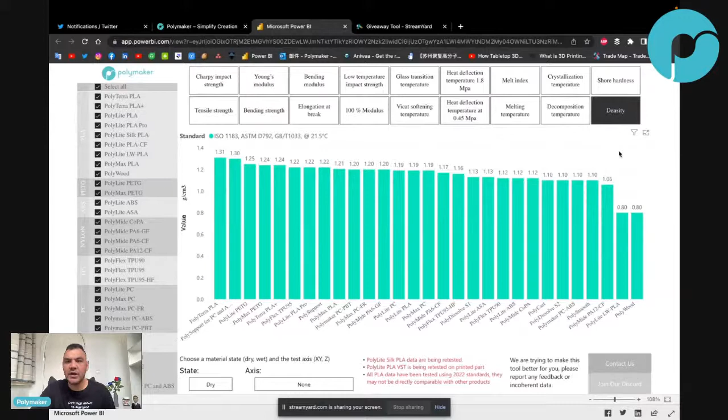So you have the Young's modulus, bending strength, elongation at break, blah, blah, blah. You have all the data that you have in the TDS, but now instead of downloading all the TDS and trying to put them together and compare the material, you just come here and select what material. Like this is the density of all our materials. You have the shore hardness, the crystallization temperature, melt index. You test the melt index at different temperatures, so that's why there's many different colors depending on the temperature.

So this is what we talked about, I think, a month ago. I told you that I'm going to make a more interactive tool. So that's the tool. What do you guys think? It's not a beautiful design, but it's very functional. So hopefully, when I explained what I wanted to do, the picture you had was more or less this.

I feel bad because I've never used Polymaker filament. Destruction, don't feel bad. As long as you have used filaments, at least. Do you have a 3D printer? If you have a 3D printer and you print some stuff, then that's fine. Whether it's Polymaker or not, that's a different story.

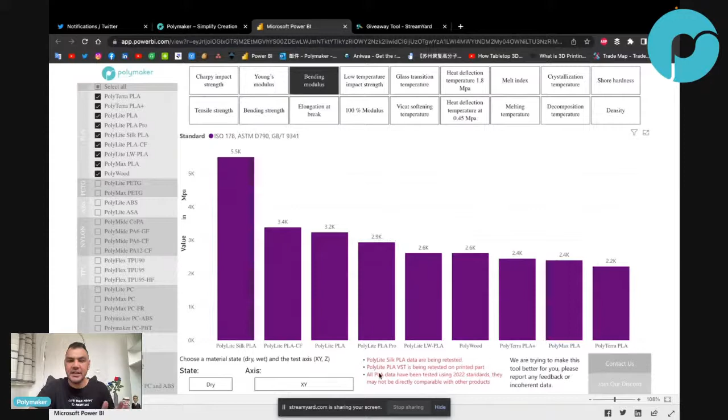If you go in the Vicat softening temperature, here you can see Polylite PLA is 158. The reason is that Polylite PLA is an old product, and before we were taking the Vicat softening temperature of the filament, not the printed part. Because of our jam-free technology, the filament has a high heat resistance, but once it's processed, the heat resistance of the part is the same as regular PLA. So that's why we need to retest this Vicat softening temperature, testing the printed part, not the filament.

And then all the PLA data are using the 2022 methodology, and all the other ones are using the old methodology. So that's why sometimes comparing our PLA with other materials can be a little bit strange. And if you find any other data that looks strange to you, feel free to contact us here. If you click here, it will redirect you to the contact us page, and you can just say, hey, I checked the glass fiber nylon, and the modulus is higher than carbon fiber, but theoretically it should be the opposite. You send us this, and we will have a look. Or you can join our Discord. If you click here, it will invite you to our Discord.

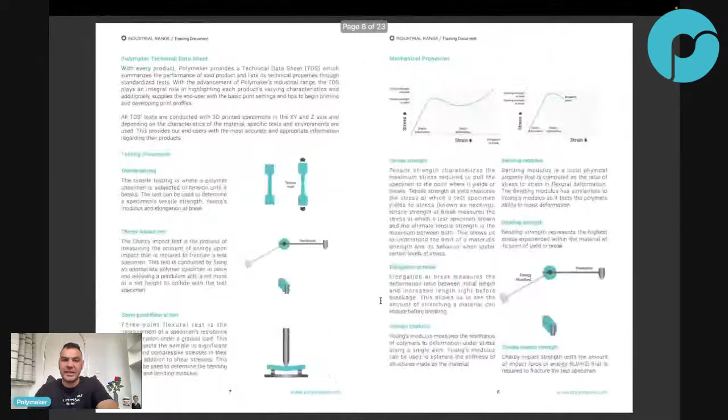Matt just posted an idea on the Discord that I think would make the site much more useful for the general public. Okay. If it's possible to add photos to the explanation card, that could be really helpful, like the Polymaker training document. Yes. So Zombie and Matt wanted to have more explanation. Like if you click on something, then you have an explanation of what it is, like Charpy impact strength. And I'm going to use this. We are going to go through this one in a minute, and this explains properly what each test is, with a picture and the explanation.

So I don't know how I'm going to do that yet. Maybe a second tab or something. When you click, if you want more information, you go on the second tab, and then you will have the explanation. So that could be version 0.2. So yes, we're working on that.

Is the blue glow in the dark going to come in stock again soon? Tim, not at the moment. We launched it as a beta version.

We had some feedback that the brightness was not as bright as the green, so we put it back in R&D. But it happened that it's very, very hard to make a color other than green that has as much brightness as green. So we may just release pretty much the same, maybe slightly brighter. But that's the reason why it was on the market as a beta test, then removed, and then we might put it back, most likely Q3 this year.

The Poly Clear intrigues me. Yeah, I don't know what the Poly Clear is. Is that a new product from us? I don't know.

Design could do some work. Yes, I know. There is basically only one small logo because I'm more of a data guy. So as long as you can select the data and stuff, for me that's it. But I haven't run it through our designer yet. Once I do that, then I will.

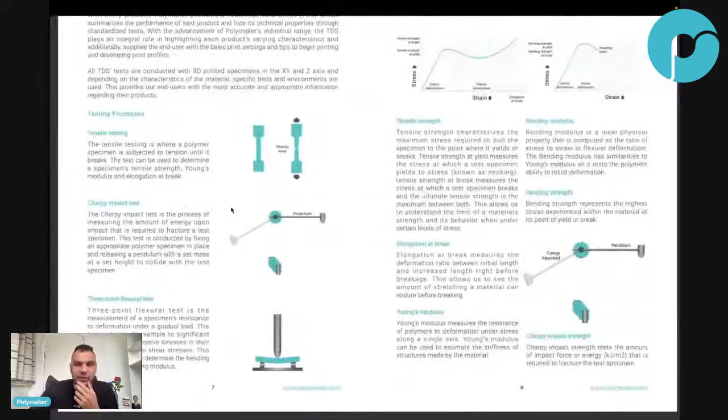Okay, so let's go into the details. I will walk you through the training document that I created for Polymaker, and then we'll go point by point. Some of them will go a little bit fast, some of them less. And if there is anything that you don't understand, just quickly put a chat message, and I will stop a little bit and explain more about that. Okay. So let me go through that.

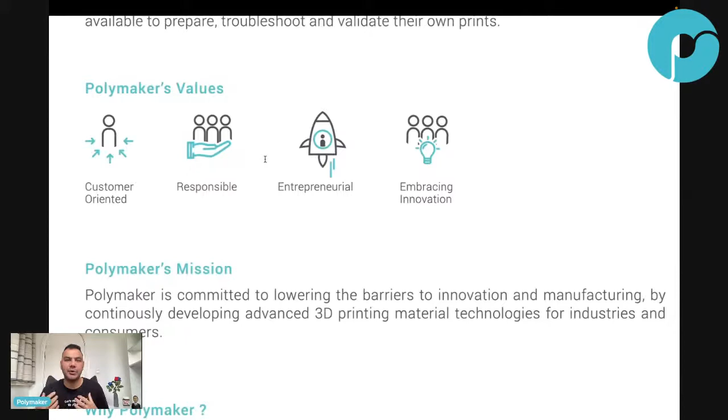Okay, so Polymaker values. By the way, did you know our Polymaker core values? Anytime we have new employees or some team building, we refocus on our core values. I don't think we market it a lot because it's really for our team, like what our principles are. But I just want to highlight them a little bit.

So customer oriented is our first one. We really have open ears to customers. Basically, they are the ones building products. They are the ones that use the product. So they are the ones that know the most about what the product should be. So that's customer oriented.

Responsible is when we do something, we are really responsible for it. When we take a decision, we are going to protect that decision. For example, if at that time we decided to launch a cardboard spool instead of a master spool, then we are responsible for that. If someone comes and says you should have launched master spool, then we will defend ourselves. We took that decision for a reason, and we are going to say that reason. Polymax PLA is the toughest on the market, and we take responsibility for that claim, and we will back it up.

Entrepreneurial is a spirit everyone in Polymaker has. You can see me, for example. Doing this stream is not really my main responsibility, but the company gives me the flexibility of doing new stuff, being intrapreneurial, like being entrepreneurial within a company. So that's a little bit this.

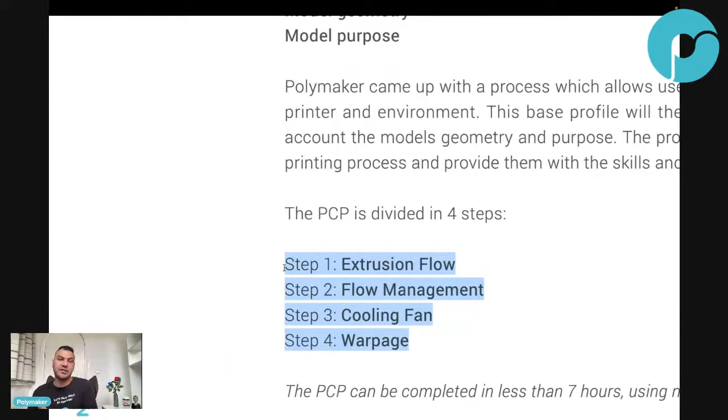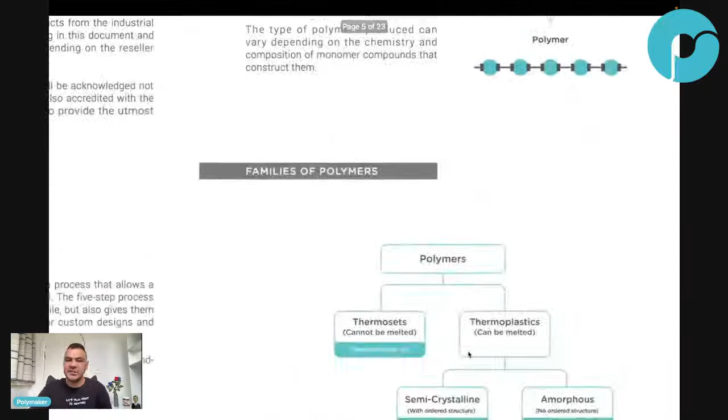And then I divide the PCP, blah, blah, extrusion flow management, cooling fan, warpage. If you deal with all of this, then you should have a very good profile by only doing this 4-step, blah, blah. So this is like a more detailed part of that training. So I start by the polymer definition. I think you all know that, monomer, and then transform into polymer, no problem. For the families of polymers, I think you are more or less all familiar with this one.

The fact that you have the thermoset on one side that will cure and cross-link, so cannot be reprocessed. Then you have the thermoplastic, and then in thermoplastic you have semi-crystalline and amorphous. So if there's any of you that is not familiar with this, then let me know. Basically, semi-crystalline: PLA, nylon, PP, this kind.

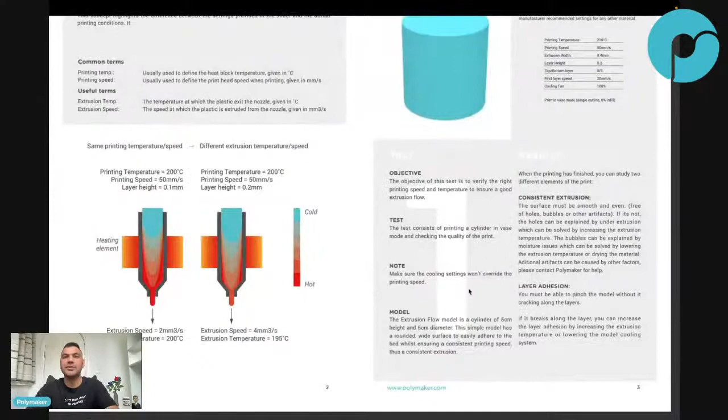Oh, am I dropping? Let me check. I think I need to change my VPN. I'm dropping a little bit. So actually, I don't need VPN. Sound choppy. Yeah. So let me close my VPN. I don't need it for now. I'm not going to go on YouTube or things like this. So let me turn off my VPN for now. Let me turn it off and reload. So don't move. Okay. So now it should be better. I removed the VPN. I don't need it as long as I'm not using Google or YouTube or something. I'm just using my PDF. So is that good?

How strong is the nylon without post-processing it? By post-processing, do you mean annealing or do you mean moisture conditioning? Like, do you mean putting it in water for some time, or annealing it, like putting it in the oven? Yeah, so the annealing will increase its modulus. How strong is the nylon? Or stronger? I don't know if you need specific factors, but stronger.

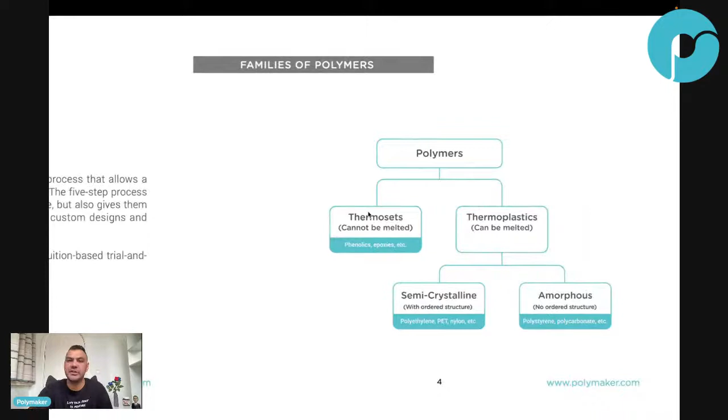Okay, all good. Yeah, so it should be very good now. I completely removed the VPN.

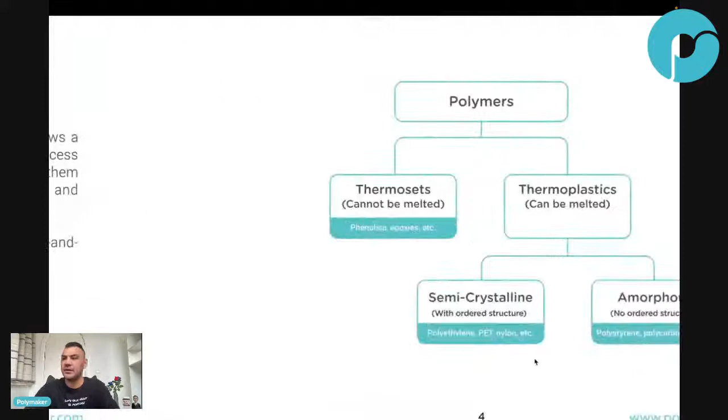Okay, semi-crystalline amorphous. Okay, do you remember melting temperature? That's one of the biggest misconceptions. Okay, what's the melting temperature of ABS? There's none, right? There's no melting temperature. What's the melting temperature of PC? There's no melting temperature, right? You remember, melting temperature is the temperature at which the crystals melt. So if it's an amorphous, then there is no crystal, so there is no melting temperature. Okay, so just to remind, semi-crystalline and amorphous.

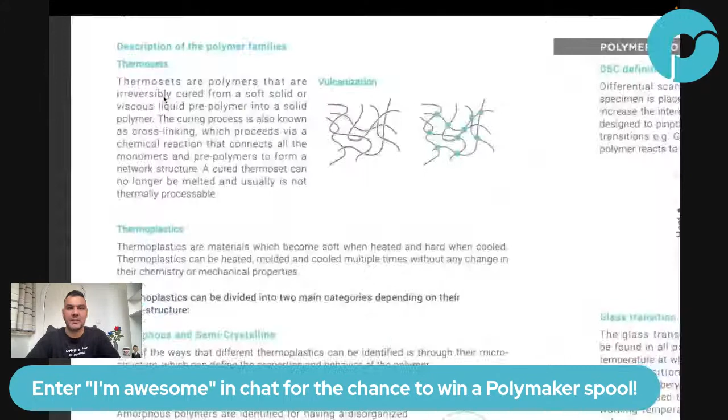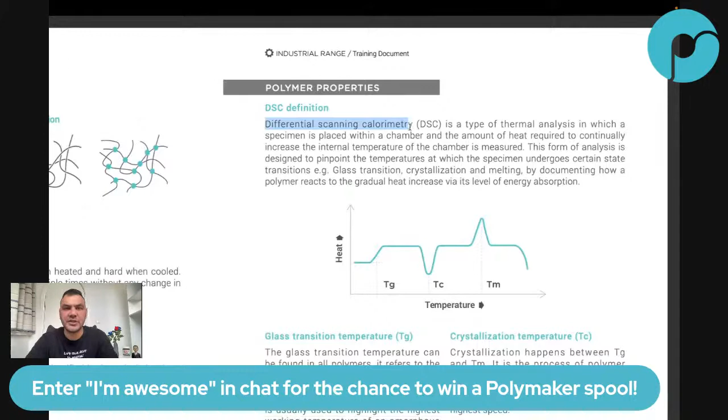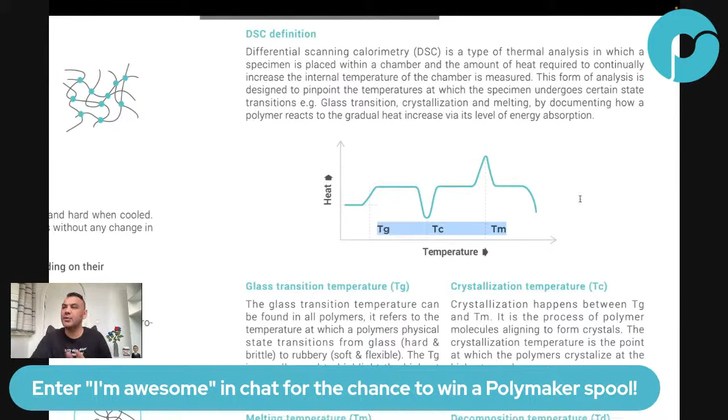Oh yeah, so I explained what is a thermoset, what is a thermoplastic, what is amorphous, what is semi-crystalline, but I guess nothing new for you. Okay, so the DSC, differential scanning calorimetry. So this is what is going to be able to define the different temperatures. So I won't go into details on this. Maybe in the Printbuster show I will explain exactly how it works, but I don't want to be boring for the people here, because this is really going into the detail.

But what you need to remember is 4 different temperature points. Okay, glass transition temperature, crystallization temperature, melting temperature, and the decomposition temperature. The TD, the decomposition temperature, is not very important for us. So the glass transition temperature is the temperature at which you go from a glass state to a rubber state, right? So from a state where the polymer doesn't have enough energy to move freely to a state where it has enough energy to move freely. Okay, so you got me.

So for example, if I give you the question of what is the TG of Polyflex TPU95, okay, what is the TG? What do you think? Is that like around 60 degrees like PLA, or lower, maybe 50 degrees, 40 degrees? What's the glass transition temperature of Polyflex TPU95 or TPU in general? I read below room temperature. Yeah, otherwise it would be hard.

Okay, so TPU glass transition temperature in general is around, I think, minus 30 or maybe minus 40 degrees. Minus something, right? Because the glass transition temperature is the temperature at which you have a rubber state, and TPU is in the rubber state at room temperature. So it means it's already above TG. Minus 20, yeah, around that temperature. So at that temperature, it will feel the same as a PLA, for example, at room temperature. It will be a glass state, so it will be solid.

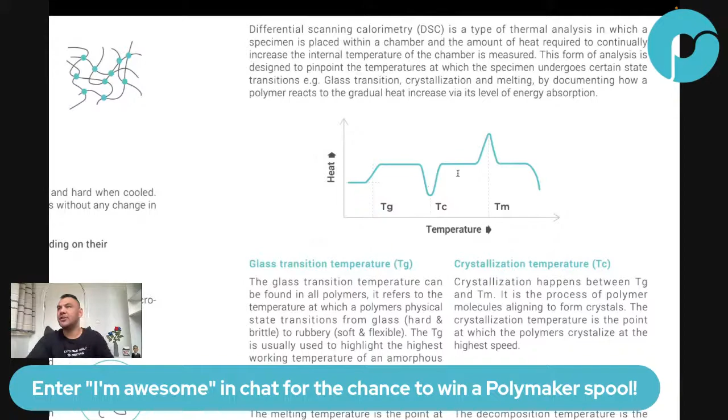Yes. Yes, that's true. Or maybe I'm the only one who gets confused. Well, I think most people are not familiar with the DSC, but you're right. It can be confusing. But again, I won't go into this DSC. So all the different temperatures are clear. TG exactly what it is, TC exactly what it is, TM, what is TD, because when you're printing, all these are very important.

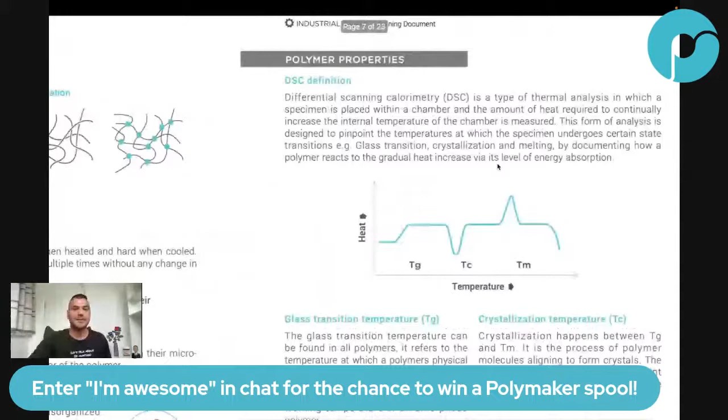I'm breaking up again. I can see I'm breaking up. Let me reload that. Let me do that. Let me reload. Okay, should be better now. I don't know. Obviously, it has to be today. When it's important to catch the whole phrase, otherwise it's too difficult to understand. Then obviously that's today that we're breaking up. Of course. Yeah, it should be better now. Yeah, that's the worst way to learn about something, where you only catch 50% of what the guy says. Sorry for that. YouTube doesn't want us to be awesome. Yeah. There you go again, Robotnik.

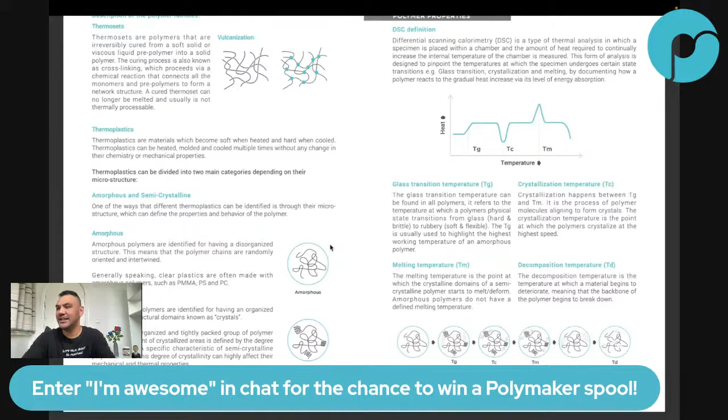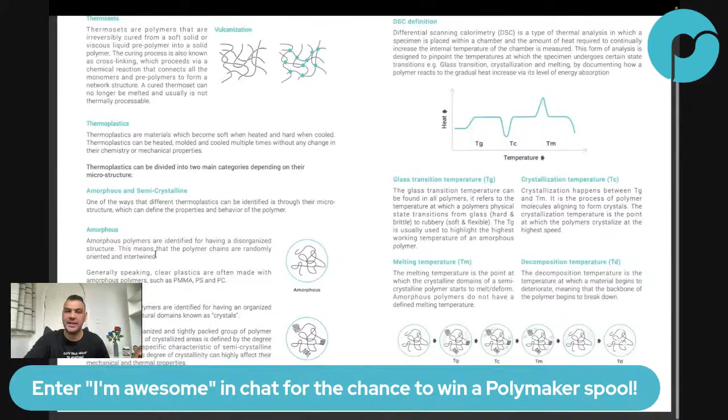Okay. Now let's go on the mechanical side. So the first one is the tensile testing. So there are many different tests that we do, and each of the tests is going to give us different values. So the first one we do is we print a dog bone shape, right? And then we do a tensile test. So we are pulling things apart. What kind of information do we get from that one?

Okay, so that's the tensile strength. Okay, and then if we have a look here, we have, let's put, silk PLA.

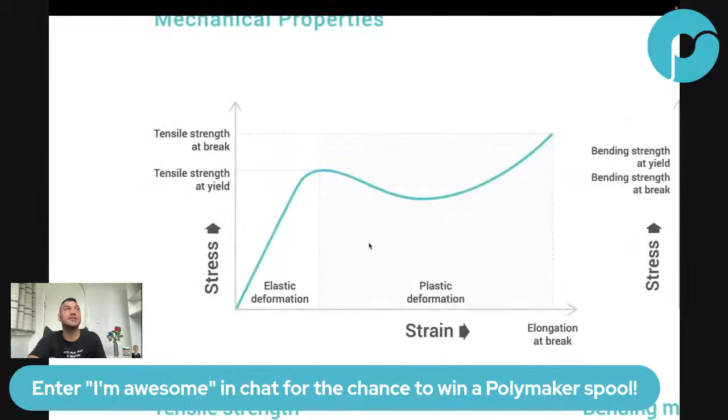What could it be? What could it be? Is it I have too many things open? Let me close the Discord. Let me close this, and then shall we close the giveaway to make it better? I need to close some stuff. Let me close Twitter. Let me close this one. Okay, I will keep the giveaway. Okay, so it's back now. I don't know what's happening.

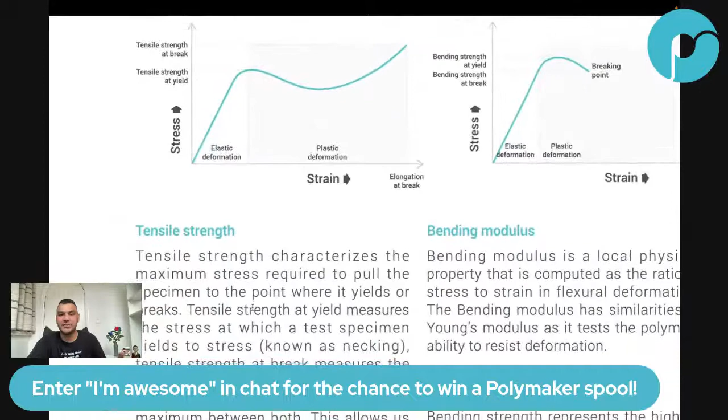So tensile strength. Okay, we will have the tensile strength, and then you will have the tensile modulus. So every time you hear me talking about modulus, the modulus is the ratio between the stress you're putting and the strain. So the modulus is going to show you how rigid a material is. A very high modulus means you require a high amount of stress just to deform a little bit.

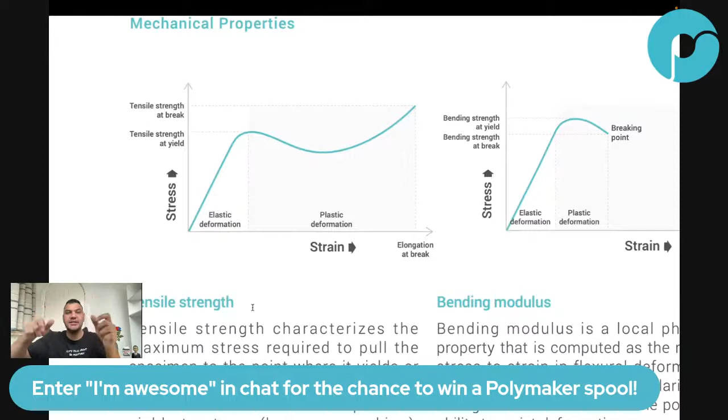Okay, so tensile modulus is how much stress you need to put for something to be pulled apart. Bending modulus is the amount of stress you need in order to bend it. Okay, so that's bending modulus and tensile modulus. And the tensile modulus is basically the Young's modulus. The Young's modulus is the tensile modulus.

Great. So we have the tensile strength, the Young's modulus, and then out of the same we have the elongation at break. The elongation at break means how far you can pull things apart. So if you check the PLA, now you can realize one of the advantages of Polyterra PLA. Can you see the elongation at break of Polyterra PLA compared to any other one? And that's based on the formula we're using. So if you notice, Polyterra PLA is a very ductile material.

How can we define what pressure and temperature a TPU can withstand, especially the TPU HF series? The glass transition temperature is low because it is a flexible material. So what should we use as a basis to define pressure and temperature of a flexible material? Tim, that's a great question.

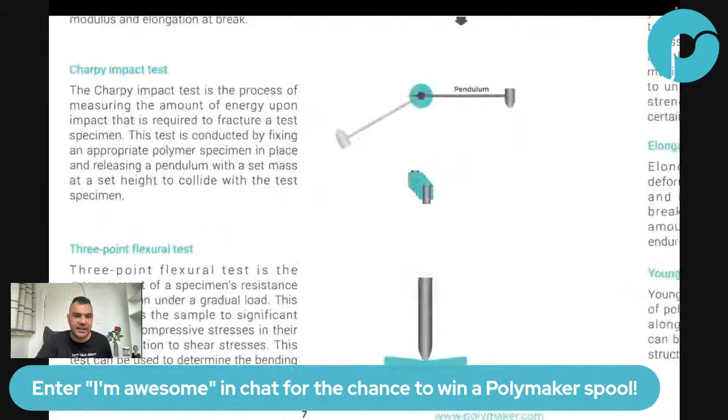Does heat deflection testing work for TPU material? No, it won't work. Only rigid material. The main reason is this one. If you go and check the HDT, so that's the bending test, but okay, so this is the Vicat softening temperature, and this is the heat deflection temperature.

So heat deflection temperature is the measure of the temperature at which the polymer undergoes a certain amount of deformation. The test is conducted using a specific load with a steadily increasing temperature by 2 degrees per minute. And then you measure...

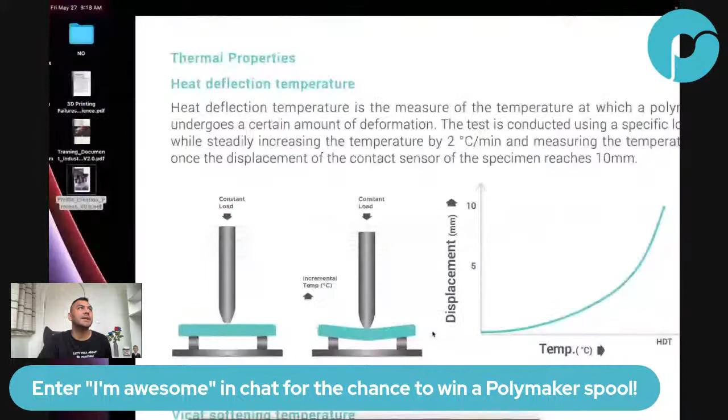Breaking up. Every time I start explaining something, then it breaks up. YouTube doesn't want to explain stuff. Come on, come back. YouTube, please. It's not coming back. I'm breaking up, I know. You good? Are you sure I'm good? Because I only have 2 bars. Okay, now I'm good. Every time I want to explain something, then it's breaking up.

Okay. So I was saying this, and what's the problem? The problem is we measure the temperature. The HDT is defined by the temperature at which the specimen will deform. The strain will be 10 millimeter. So what's the problem with flexible? The problem with flexible is you put the same load and it's already reaching 10 millimeter. So we cannot use that standard.

So there are 2 loads. The first one is 1.8 megapascal. The second one is 0.45 megapascal. I think it's called HDT-A, HDT-B. So that's the main reason why we cannot use HDT. So the answer is only rigid material.

I've only used PLA, never tried anything else. David M, you need to be adventurous. Try some other one. Try ASA. Every time there's an explanation, it's breaking up. Yes, looks like YouTube doesn't like we explain things properly. Polymaker has 9 types of PLA.

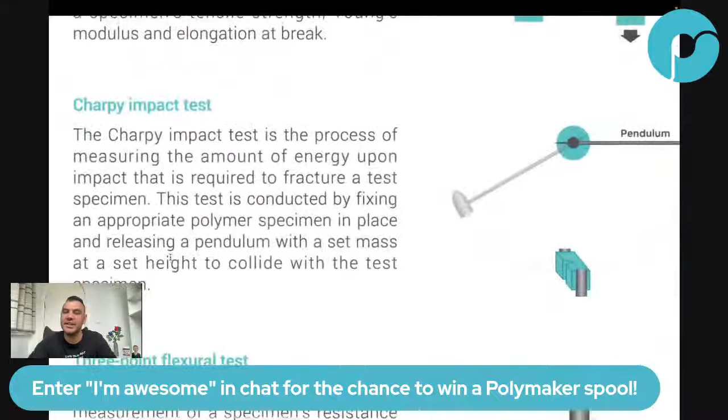Okay, so let me continue. Again, if you have any question, please ask. So that was the tensile testing. The other one is the Charpy impact strength. What's the difference between the Izod and the Charpy? I think the main difference is with the Charpy, you hold both ends, and then you kick it in the middle. And on the Izod, you only have one end, or the other way around. I don't remember. Let me see. Yeah, I think the Charpy, you take both ends, and Izod, you only need one.

And then you have the notch. The notched test has a notch inside, and the unnotched test has no notch. Can I use the charts to determine creep in a finished part? No, you won't be able. But I do have some other data that I can put. That is actually...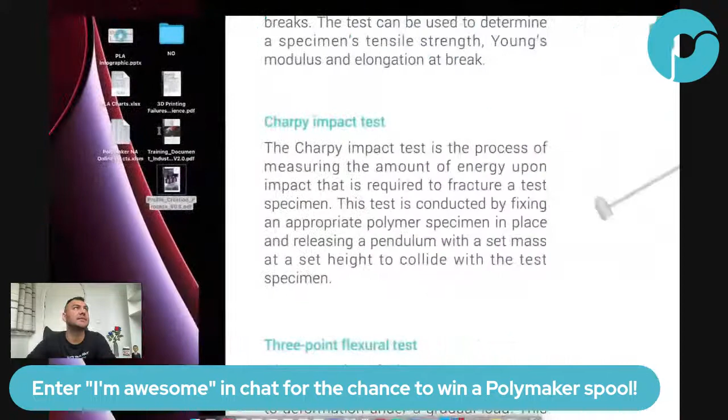You see, I start to explain something and then it's breaking up. It's not going to be a fun stream today. I don't have good internet. Breaking Bad. Stephen Poole, don't worry. You're not missing much because it's breaking all the time. How about I disconnect my phone? Okay, good again. It's going up and down, I guess. I think you're being censored on purpose today. Yeah, I don't know what's happening. Hi, Stephen. Hi again.

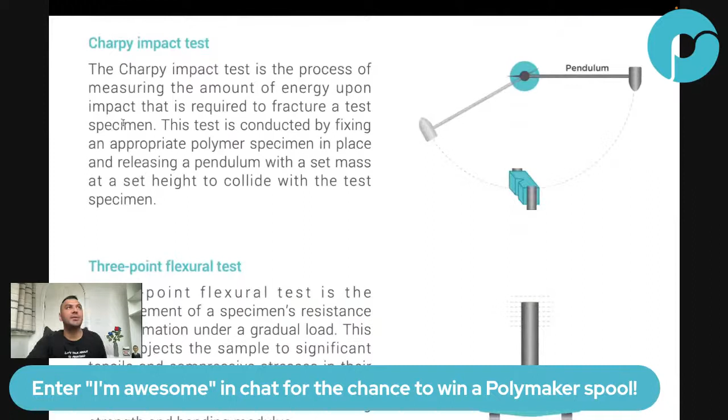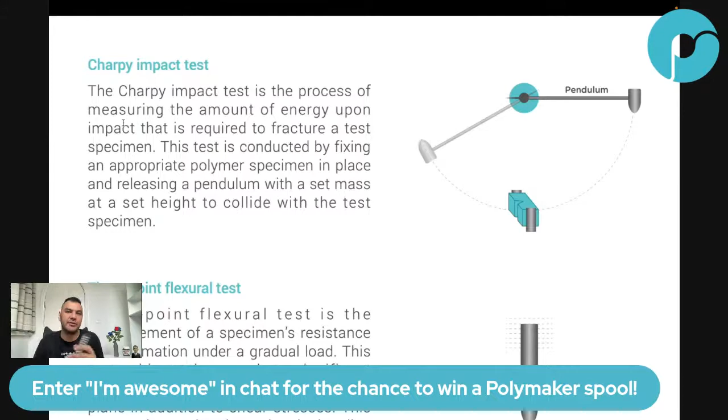Okay, so that was the Charpy impact strength, and usually that defines the toughness of the material. So I like to say a material is very durable if it has a high impact strength. Durability means you take your part, you play with it, you throw it away. So if it's very durable, then usually it will have a high impact strength, a high toughness, rather than this, which is more rigidity.

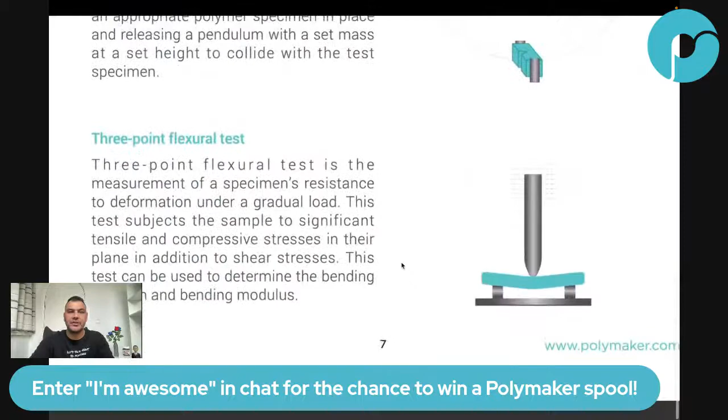This is the strength. Usually when people think about strong, my guess is they usually mean durable. Like, is that going to break when I use it? And usually that's related to Charpy impact strength, not really the tensile, in my opinion. The next one is the bending strength. This one is very straightforward. So Charpy impact strength, tensile, Young's modulus, bending strength, bending modulus, elongation at break.

Low temperature impact strength is the same, but the part is cooled down to minus 30 degrees. So we did that, for example, for our PC-PBT, which is a low temperature impact strength material. So even at minus 30 degrees, we have a high impact strength. It will maintain, I think, 70% of its 25 degree value.

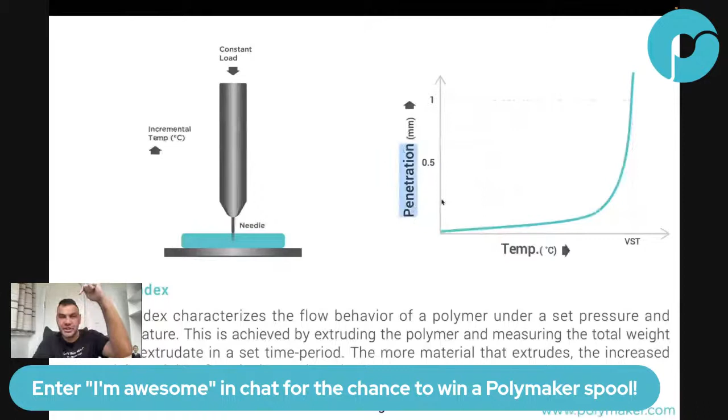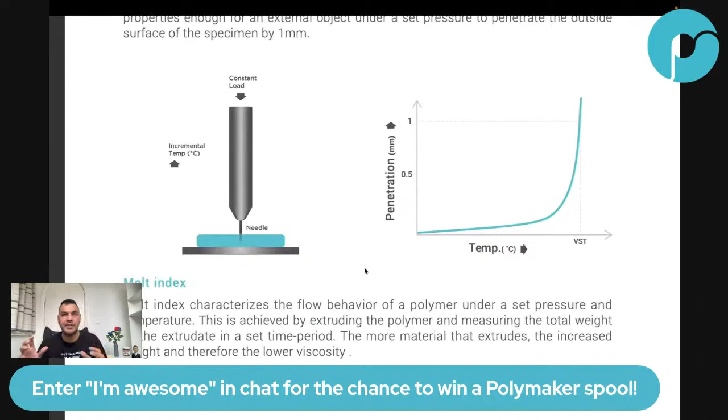The Vicat softening temperature is good for heat resistance that won't undergo much stress, right? So it just needs to stay rigid for itself. So the Vicat softening temperature is good for that. The HDT is good to know for the operational temperature range of a part.

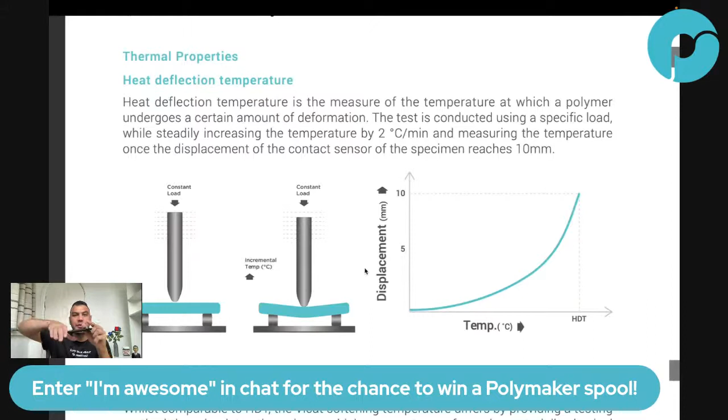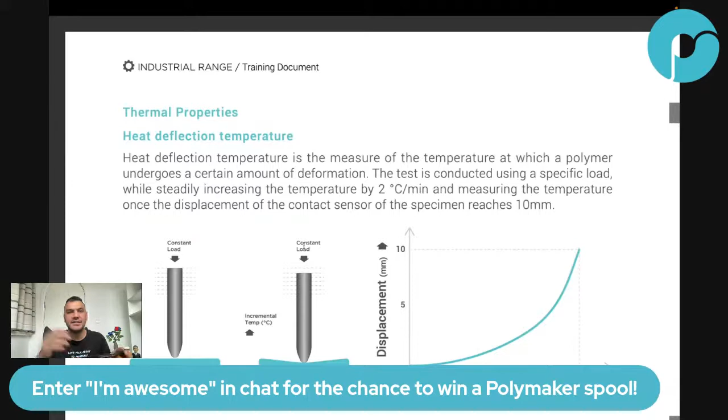So let's say we were talking about creep, right? So let's say you have a part like a bracket, and it needs to withstand a certain stress, but at a certain temperature. So maybe the Vicat softening temperature of the material is, let's say, 100 degrees, but under stress, even at 60 degrees, maybe it will already fail. So that's why you need to look at the HDT more than the Vicat softening temperature.

I've been thinking about trying a flexible filament, but I'm not sure how well it will work with a Bowden setup. Okay, Big Plastic is unhappy. You're giving up all the secrets.

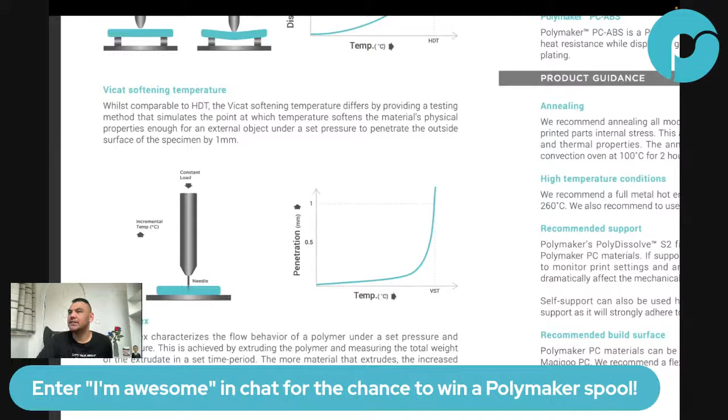Okay, so David M. Flexible material. Let's do a parenthesis here. Let's go a little bit away from this technical thing, and let's talk about printing TPU. What's the key of printing TPU? Why is it difficult to print TPU? Let's go to the basics. To 3D print, you basically push a filament through a nozzle with pressure, and then you lay it down, right? And to create that pressure to extrude, you use a drive gear, and that force will be translated through the filament to the hot end, to the nozzle, okay?

So the problem with flexible is they don't transfer the force very well because they're flexible. So if you have a part here and you push it, it will be very hard for that part to move because it cannot transfer the energy very well. How do you solve that? Make your 3D printer not require that much force to extrude. Instead of extruding with a lot of force, you extrude with a material that's very liquid, not very viscous. You do that by increasing the nozzle temperature, increasing your nozzle size, or reducing friction in the nozzle.

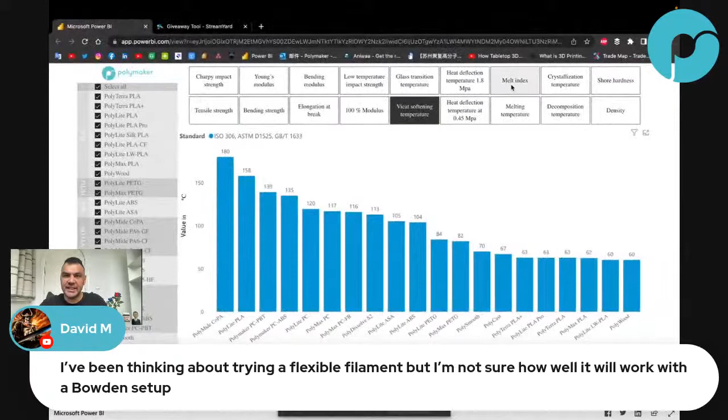And that's why we have created TPU HF, high flow. High flow means the melt index of that TPU is very high, which means it won't require as much pressure to be extruded. Let's check our TPU. So this is regular TPU 95: the melt index is 4.5 at 210 degrees. And TPU 95 HF, the high flow version, is 9.3. So it means 9.3 grams.

Sorry, I didn't bring water.

9.3 grams, and it's at 185 degrees. Why? Because if we put 210 degrees, the amount is too high. It's above 15 grams, and above 15 grams is considered not good for this testing method. So now you can see the advantage of using HF, because you won't require as much pressure. Breaking up again.

Okay, so how about this? Let me wait until I'm not breaking up again, and then I will ask the question: shall we continue with robot voice explanation, or move the stream to Saturday? Internet is not happy today with our in-depth discussions.

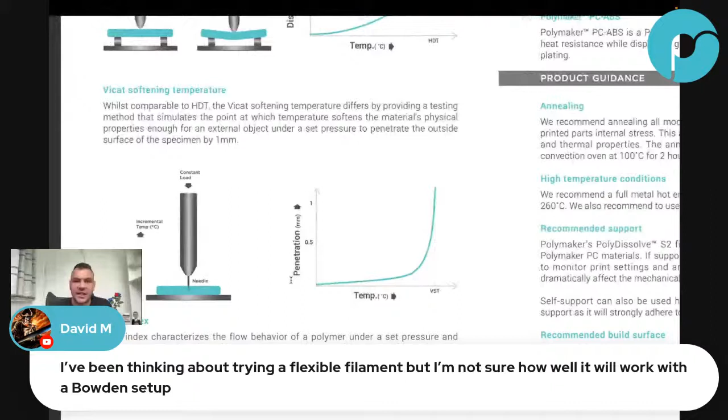Breaking up again. Chop, chop, chop, breaks up when you switch to that screen. Okay, so how about I just remove everything? Robot time. I removed everything and let me just not share the screen, we can talk and see if it's better. But I think it's just unstable, it goes up and down. Power BI is too powerful for your internet. Yeah. Oh nice, Zombie is here. Oh, he was here before. Nothing wrong with them, just always ordering printing gears.

Okay, so the calibration cube. Basically, the idea was brought up by Zombie, I think, when we were thinking about Printbuster topics. Printbuster topics are things that are common knowledge, but in reality are either not true or not really what people think. So if you have some topic like this, please let me know, because then we can put it in the Printbuster show.